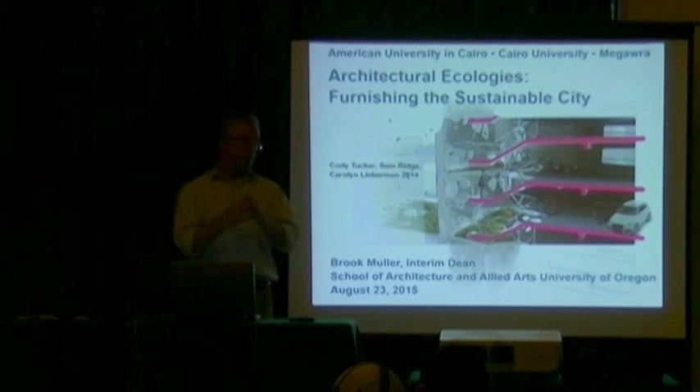And I'm going to start out with a couple of early projects in my practice career that have really set a foundation for my teaching. And also my teaching is a collaborative venture. I work with ecologists and economists largely in thinking about architecture at the intersection of ecology and economies. And I hope that should be clear as we go along.

So I was very fortunate when I graduated from architecture school. I went to Stuttgart. I knocked on the door of Behnisch and Partner. I said my German is sehr schlecht, but I would really like to work in this office. And they hired me, and they put me to work on this competition, the Dutch Institute for Forestry and Nature Research. And we ended up winning the competition. I thought I would be there for 6 months. I ended up living there for 4 years working on this project.

And so basically we're out in this cornfield in the eastern part of the Netherlands, and they wanted to take these different departments, wildlife, biology, landscape ecology, aquatic ecology, and put them all under one roof, this Federal Research Institute. And offices and labs were the two main components programmatically. And so the first idea was to actually separate the laboratories from the offices, because the laboratories are going to require strict mechanical ventilation, whereas we had opportunities with the offices to rely primarily on passive or natural ventilation.

So the first idea is to separate out the parts if they have fundamentally different energy requirements, and you can actually start to make some inroads in that sense. The other idea on this cornfield, so these people do forestry and nature research, and it's a cornfield. So we introduced these gardens, these postage stamp shaped gardens, this array of gardens, and each one represented a different biotope of the Netherlands.

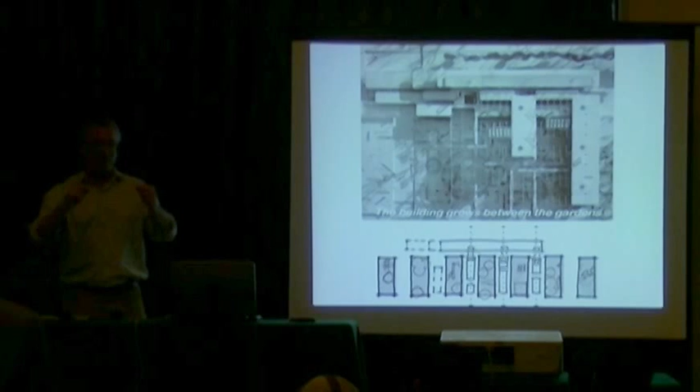So a wetland garden, a meadow garden, a forest garden, and then we grew the building between the gardens. So you usually think of the garden as the thing that changes and is dynamic, and the building is something that's fixed. And we wanted to reverse that and have the garden be the armature within which the building grew. So should this research institute be successful and have to hire a lot more people and get a lot of grants and they need to add on, it's a weak form building by design, and it's very evident where you would add on to it.

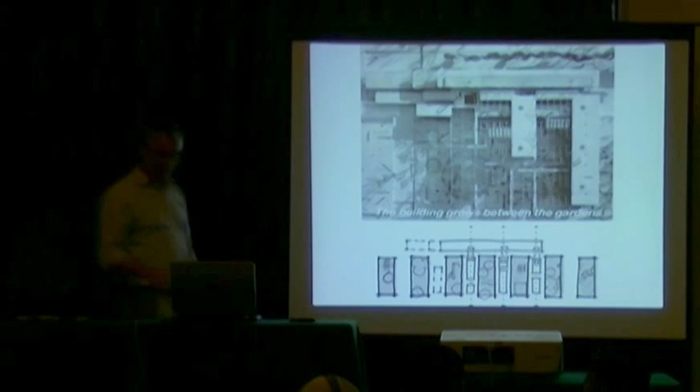At the intersection of the office wings and the garden, where they overlap, we introduced these greenhouses. So you can see the greenhouses here. Single glazed, off-the-shelf technology, very inexpensive, available throughout the country. And we thought of those as energy buffers for the building.

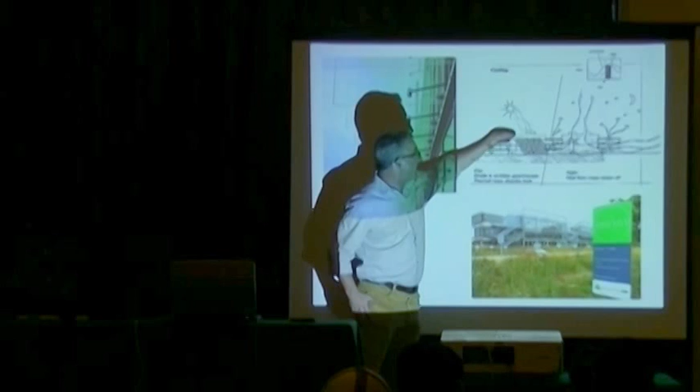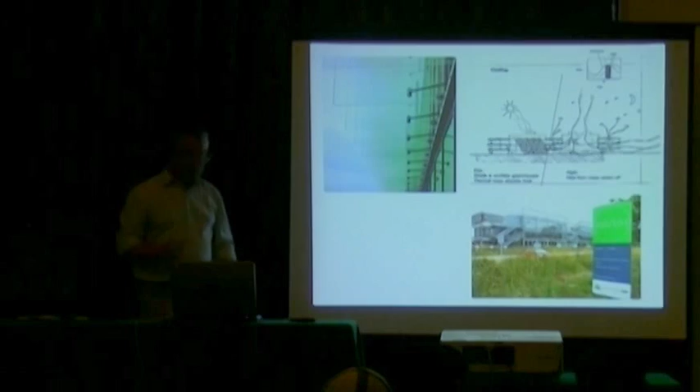So in the summer, during the day, you deploy these shade cloths and try to keep the atrium spaces cool. And at night, you would open it up and bring the cool night air through and try to cool it off. In the winter, you'd do the opposite. You'd have the shade cloth deployed at night to block the heat and open it up during the day to capture the sun. And so this is what it looks like.

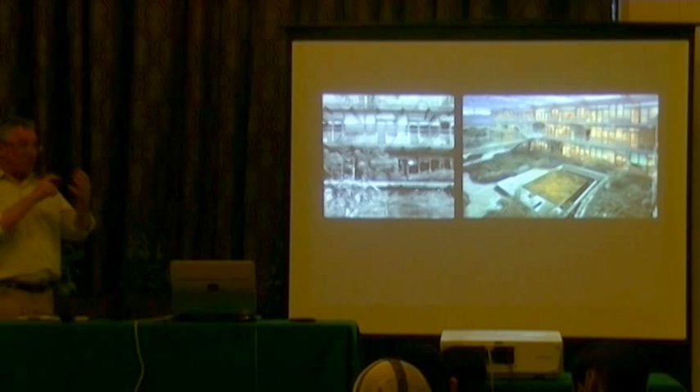And so one of the other ideas that I'd really like to communicate with this lecture is there's an idea about sociability and how people interact, and there's an idea about energy performance, and those things are not separated, they're actually one and the same. So the sociability diagram and the ecology diagram are one and the same.

This is, by Dutch standards, a very inexpensive project. There's no air conditioning for the offices, really reduced reliance on mechanical equipment. We capture all of the storm water, divert it to cisterns, use that water to water the plants. The evapotranspiration of the plants has a cooling effect. Really trying to think of a set of very simple systems that interact to create a low energy building, which is also a really delightful place to work.

And so you can see how dated this is. See the computer right there? You can tell this is a 20-year-old building.

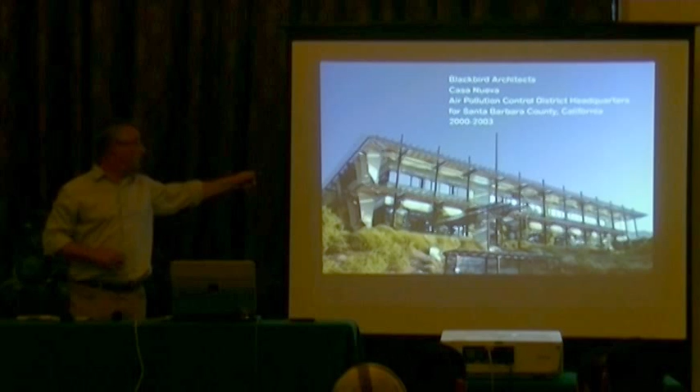Okay, so the idea that the ecology diagram and the social diagram intersect. I went, after my experience in Germany, to Southern California to work with Blackbird Architects. And we were hired to do the Air Pollution Control District headquarters for Santa Barbara County. And it's a very inexpensive building. It's basically 2 boxes, an L shape.

And what we did is we took wooden telephone poles, which are really inexpensive, and we marched them across the south facade and then strung canvas to it. And that's a shade element. And then we planted wisteria vines. So this is during construction. And those wisteria vines grow up. The canvas deteriorates over time. And then the wisteria starts to take over.

And so for the Air Pollution Control District of Santa Barbara County, their billboard is this living facade. And when you open your window, wisteria has a really nice scent. You get the scent of the wisteria coming into your office.

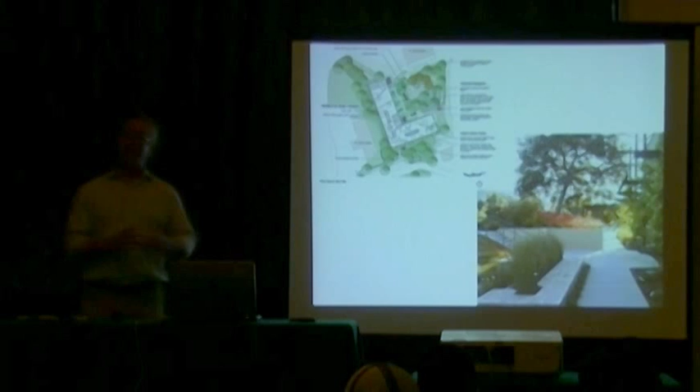So in the United States, interior space is $300 a square foot, and landscape is $15 a square foot. So my recommendation would be to try to think about how landscape elements could be incorporated as part of the very basic bones of the architecture.

Okay, I'm going to give you a little bit of an introduction to, do we want to? Yeah, we'll add some chairs. Okay, if you don't mind. No, I don't mind. I'm amazed. We'll try to add some chairs so that we can have as much as possible. Not at all. I hope I can live up to the crowd. I'm so impressed.

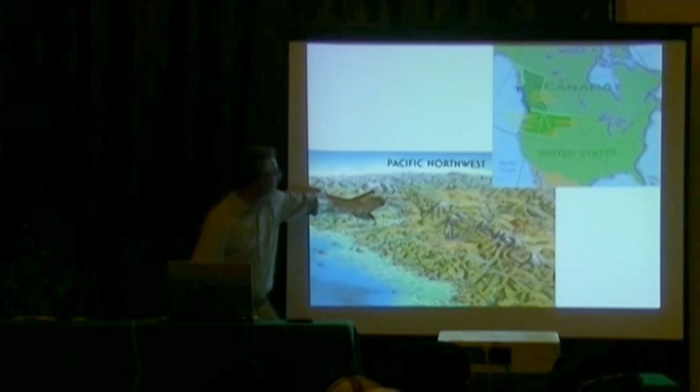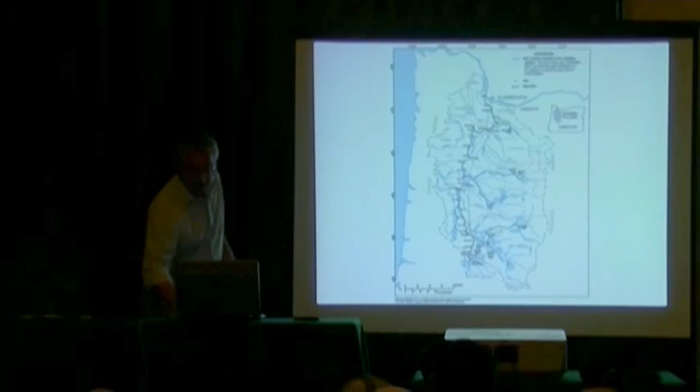So here's the Pacific Northwest. Here's that temperate sliver that I described. Here's Portland, Oregon, Seattle, Washington, Vancouver, British Columbia. I live in little Eugene right here. The Coast Range, the Cascades, and then the high desert. So I'm going to show some images. And so this is the Willamette River watershed right here. Just to point this out.

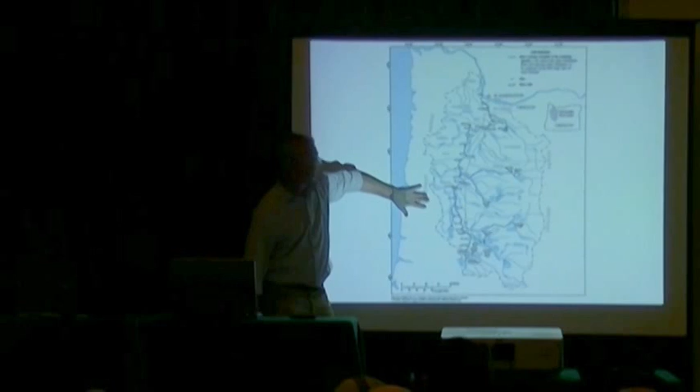By the way, there was a University of Oregon anthropologist who found the oldest pairs of shoes that have ever been found in a cave here. So this used to be a lake, and I think they're about 12,000 or 14,000 years old, somewhere to that effect.

We have Nike in Oregon, so I think there's a connection. We've been doing this for a while.

And so basically in the American West, over a longer climatic history, we have ice ages and then interglacial periods where it's much warmer. And we're thought to be in an interglacial right now called the Holocene. And so it's much warmer over the last 10,000 years than it was 13,000 years ago. And it's getting quite a bit warmer.

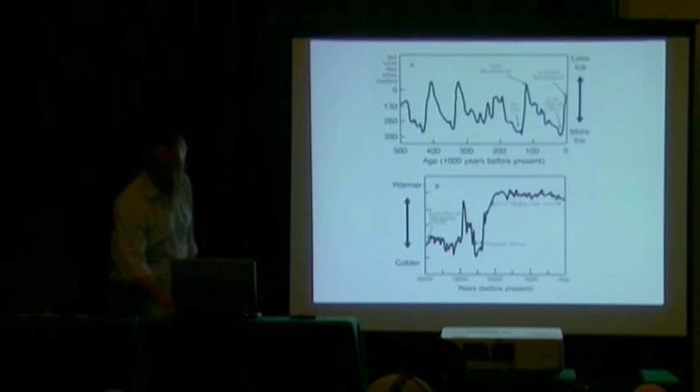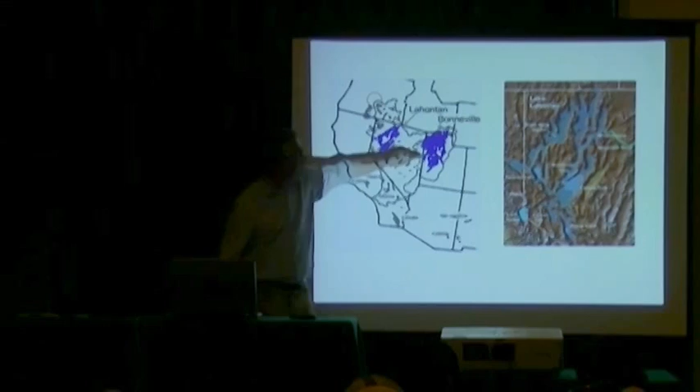So this is where that cave, Fort Rock, was, where the shoes were. And this is Nevada and Utah. And these are historic lakes. And then the remnants of this lake are just this lake, Lake Tahoe, and Pyramid Lake. So over the last several thousand years, it's getting much warmer and much drier. And of course, now we have climate change. So I'm not sure if it's just the natural climate cycle or climate change, likely some combination.

When it snows, the soil is always wet, and it prevents forest fires. If there's no snow, it's very dry, and we have these astonishing forest fires. So when I left Oregon to come here, I flew from Eugene heading east, and for the first 2.5 hours, it was just fires everywhere. I called my wife this morning. It was last night in Eugene, and she said the airport closed. There's no visibility. We have a really big problem.

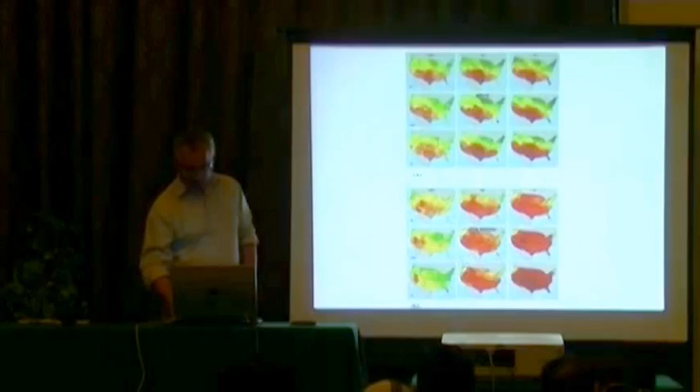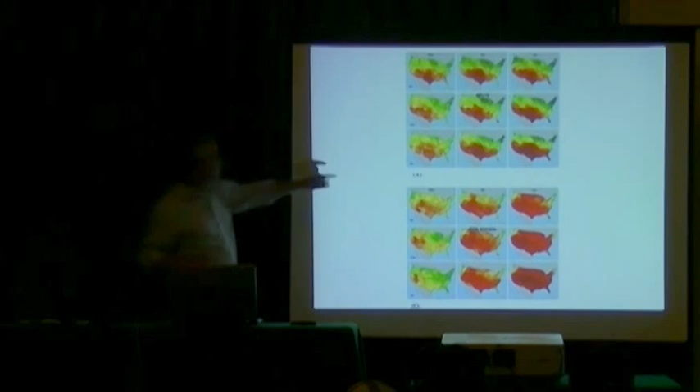And then our projections moving forward are even more severe problems. There are different scenarios for how climate change might play out. Here's the Pacific Northwest. So it looks pretty good, relatively speaking, under all scenarios. If you're in Phoenix, Arizona, or Las Vegas, or Los Angeles, it looks bad under all scenarios.

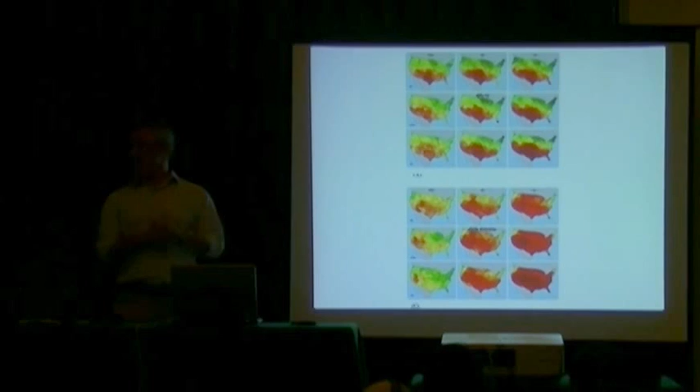California has 40 million people, Oregon has 4 million, but we're currently witnessing an exodus of people from the southwest to the northwest, and so we're bracing ourselves for significant growth over the next couple of decades. So here we have, it depends on how you measure it, but some say the largest infrastructure project in the history of humanity, the California Water Project.

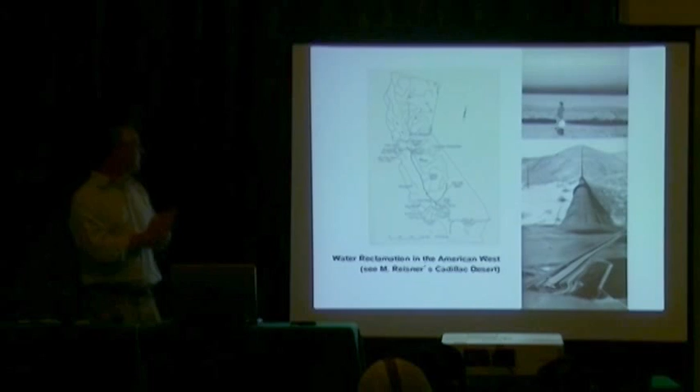And we're bringing water from mountains with snow to Los Angeles, but there's no more snow. So this vast infrastructure is quite vulnerable, actually. And it turns out that 20% of the electricity consumed in California is used to move water. So it's really this combined problem.

The electricity comes from the Hoover Dam. The water is so low that pretty soon they're going to have to turn off the turbines. They're not going to be able to run electricity. We're going to have brownouts. If you're in a building in Las Vegas with inoperable windows and it's 115 degrees Fahrenheit and there's no electricity, they estimate that you have between 15 and 20 minutes to get out of the building before you asphyxiate and die. Okay, so that's our top environmental rating in the United States.

This is a problem. So I'm very proud to be at a school, the University of Oregon, that really looks first and foremost at passive design principles. We're the #1 ranked program in the US for that. And it's based on people like G.Z. Brown, who've been looking at natural heating, cooling, lighting, and ventilating of buildings for a very long time.

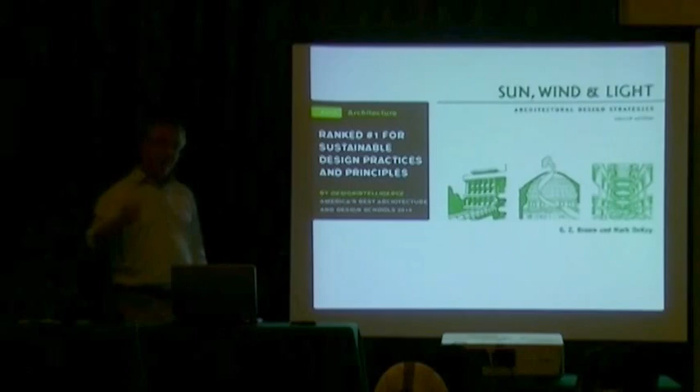So the first thing you do is be intelligent about the orientation of the design, the organization of design, aware of the climate, and only secondarily do you then add mechanical systems. You save money, you save energy, and you can make better buildings as a result. It's more interesting architecture. We also look at these issues at a landscape scale, so our landscape architecture department.

Dave Hulse looking at the Willamette River Basin, developing these really interesting models that look at land use change, climate change, and population growth, and different assumptions about each of those variables and how the future of this region is going to play out. Really, really interesting stuff. And then also affiliated with this entity in Portland called Eco Districts.

So sustainability is not just energy, and it's not just water, and it's not just mobility, and it's not just habitat and all these other factors, but it's really thinking synergistically about how these things interact with one another. So we can rely on less energy, less material, less effort to make buildings that are more intelligent.

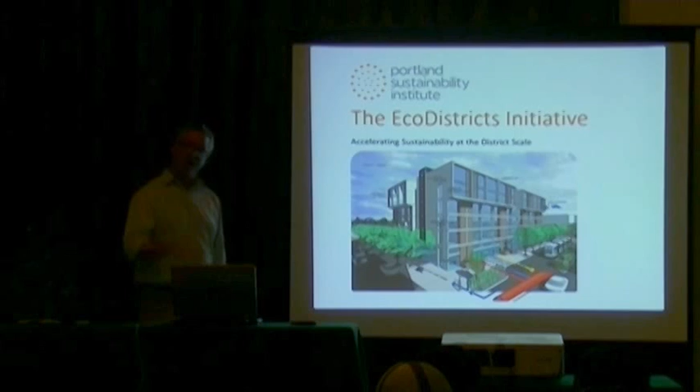And frankly, I had a tour of some medieval Islamic architecture in the city, and that's just some of the most intelligent architecture you will ever see from a climate adaptation point of view. It's like we have to return to our history to look for ways of making architecture in the future. But I really like how they're saying, the building scale may not be the scale to address this most optimally.

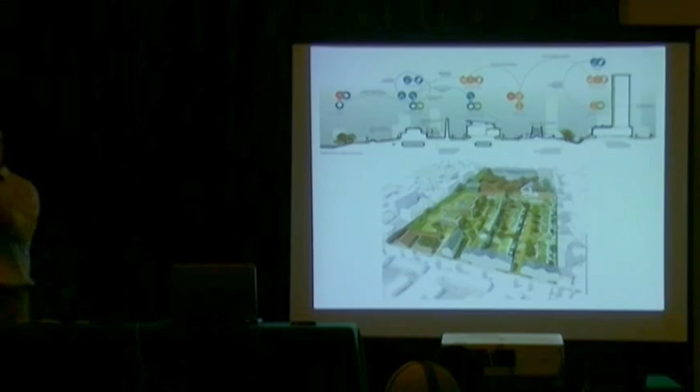My building site is high and dry, and it's great for collecting the sun, and yours is low and wet and great for collecting water. So why do I have to do all of the work myself? How might we partner to achieve greater efficiencies? So this district or neighborhood scale may prove to be the most effective scale to be thinking about this stuff.

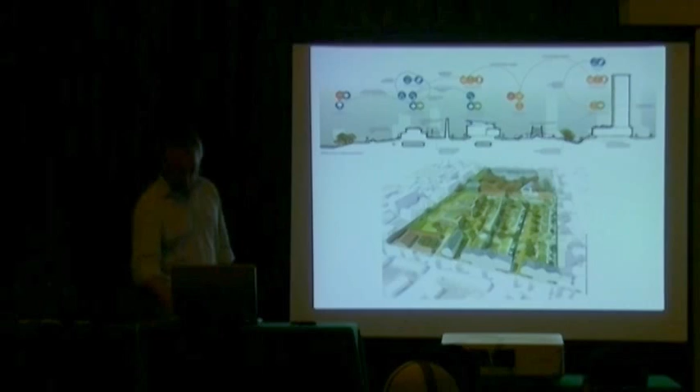But that's going to require new finance models. And so in addition to the design, how are we going to fund this thing? So my site's high and dry and yours is low and wet. What incentives do we have to pool our resources? How does the money flow? And so people are actually working on finance models that incentivize these kinds of partnerships, which I think is really, really critically important.

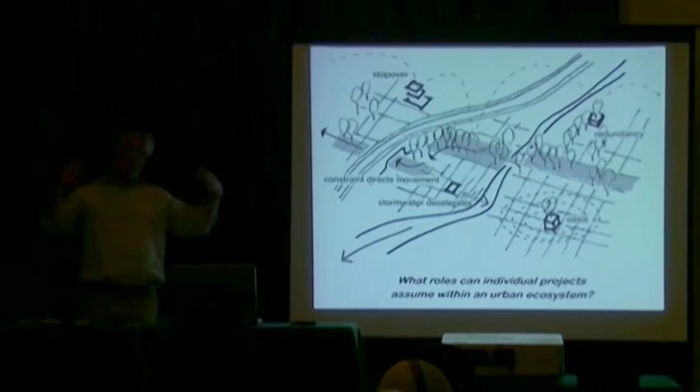My own particular work, actually working with an ecologist, we start to ask, what roles can individual site-scale architectural projects play in supporting broader ecological function? And it's a pretty interesting thing if you start asking yourself, when you work on your projects this coming semester, if you're a student in a design studio, what's the role of my project in the watershed? What's the role of my project relative to these larger ecologies?

And so at the massive scale, the city scale, Buro Happold's new city in China, we can start to think about green and blue as part of the infrastructure of the project. So wetland complexes for stormwater collection to prevent flooding, to provide habitat, and green space for the lungs of the city and for wildlife connectivity and all these things.

That's all great for a new city. I tend to work in existing environments. The city's already there. I have this little site, and I'm trying to think, how can the aggregate of smaller scale moves start to build something more functional from an urban ecological point of view?

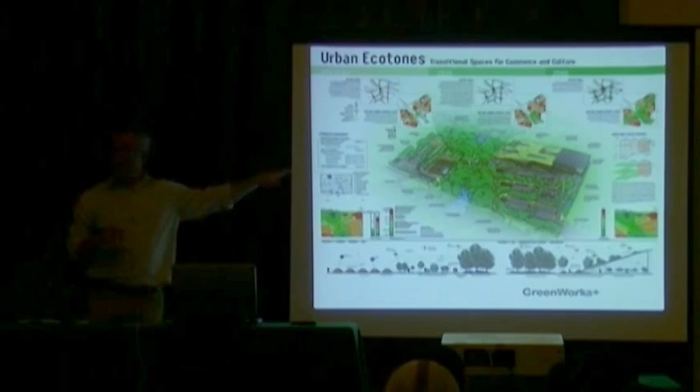So this is a suburban project, a retail project, but actually the site plan is such that you're protecting and supporting the hydrological function of adjacent wetlands. So the building is actually collecting, filtering, cleansing water, the green roofs, before it's directed to these wetlands. And so again, there's some interesting synergies that we can start to create.

I had a student working on a... high density in Oregon is a 3-story building, okay? Just to put things in a little context here. We start to get nervous when we get up to 4 stories. It's like, wow, big city stuff.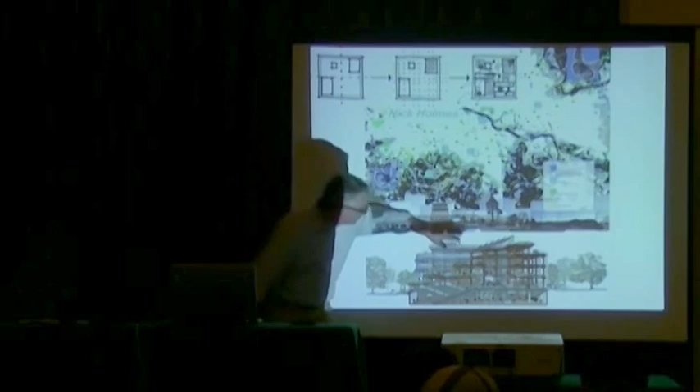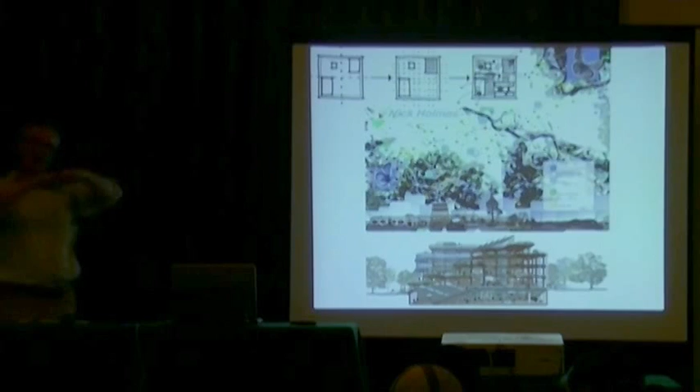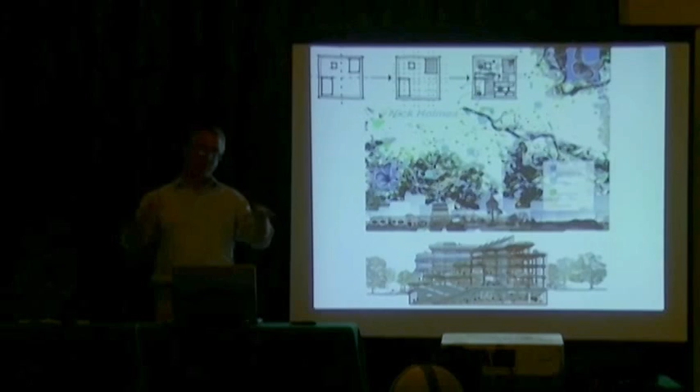So just so you know. But he was looking at a building in downtown Eugene and looking at this fragmented butterfly population in the southwest hills and the northeast hills, and he started to realize if I plant Kincaid's lupine, the larval host plant for this butterfly, on my roof, I could have a stepping stone for that population to intermingle, ensure a more diverse gene pool, and ensure the long-term survival probabilities of this species. So using elements of buildings as part of a strategy for ecological regeneration.

And if you think that's crazy, many of you have probably seen the California Academy of Sciences project by the Renzo Piano Building Workshop. And I got to meet this guy, Paul Kephart from Rana Creek Living Architecture. He does the largest green roof installations in the world. And so here's Renzo Piano with this beautiful, evocative sketch of this roofscape that's mimicking the Golden Gate hills of San Francisco in the background.

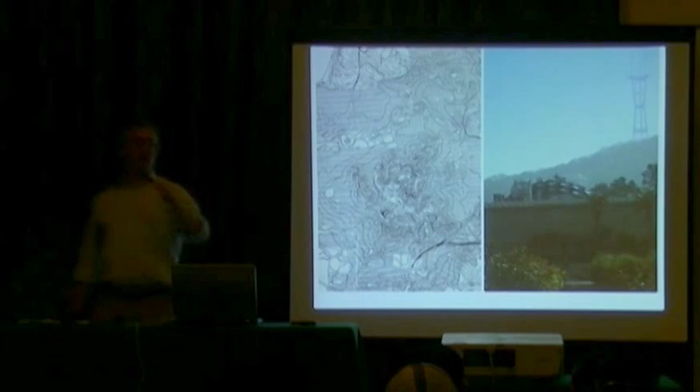Paul Kephart, who installs green roofs, is looking at this undulating roof and he's like, this is amazing because I only do flat roofs. And if you have an undulating roof, you have a shady spot and a wet spot and a dry spot and a sunny spot. And I can create a much more diverse set of ecologies on this rooftop. So he calls his work acts of eco-sabotage because he uses native wildflowers and grasses he plants on these roofs. So he's thinking about roofs as nurseries for endangered species, which is pretty incredible. Sometimes the architects don't know it. Sometimes they do.

So a green roof. Where I live, we get a lot of rain in certain periods of the year. And with all of these hard urban surfaces that are polluted, that rain gets directed really quickly to the waterways, and we have flooding, and also the pollutants kill fish and other species. So the idea is to have green roofs reduce the rate of stormwater flow to water bodies, to moderate the temperature inside the space itself, to reduce the urban heat island effect.

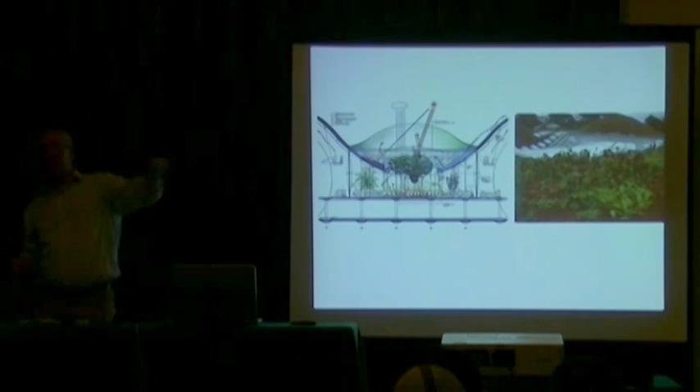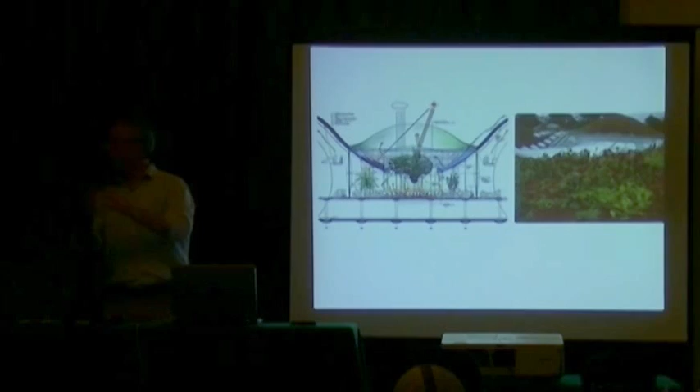But Paul Kephart's saying we could also start to think of these as part of a connective system for macroinvertebrates, bugs that are flying around, that birds then will be attracted to. So birds making their way up and down the Pacific Flyway. I love the idea that one building is part of a hemispheric migration. It's a pretty beautiful thing. And there are people who go up on this roof to do bird counts, and it's really working the way that it was intended.

Of course, I don't know how many millions of dollars per square foot this project is, so it's not like this is going to solve our ecological degradation issues. And then this guy has a nursery, and he's devised these really innovative trays to transport things. They're made out of coconut fiber, and you can just lift them into place. Over time, the coconut fiber deteriorates and provides nutrients for the plant. So a pretty thoughtful approach. But it doesn't have to be habitat, and it doesn't have to be expensive.

So I thought I would just show this one last project before moving into the second half of this talk. So this is a fairly new, very modest project called the Burnside Rocket in Portland, Oregon. It's in this sort of light industrial part of the east side of Portland.

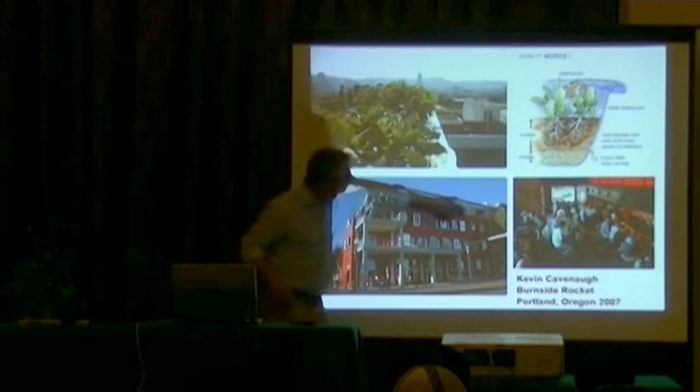And there's the restaurant on the top floor, and they wanted to do an integrated green roof, but they didn't have the money. So they bought a bunch of plastic children's pools, kiddie pools. They drilled holes in the bottom, they put them up on concrete blocks, and then they're growing food.

So if you order a salad in the restaurant, it's coming from above your head, up in the roof. And what they're finding is that the microclimate of the roof extends the growing season in this cold climate by 2 to 3 weeks.

Okay. So one of my favorite authors, David James Duncan, wrote an autobiography called My Story as Told by Water. And because my name is Brook, I'm going to tell my story of architecture as told by water. If energy was the first generation of sustainable architecture and climate change and carbon footprint the second, there's no question. Everywhere I go, people are confronting major, major water issues. So let's think about that.

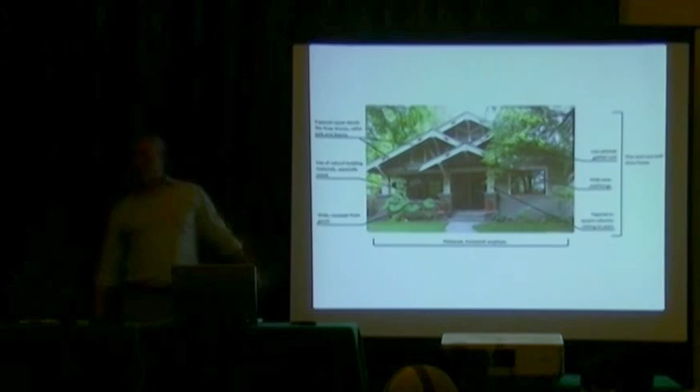This is a typical house where I live. It's called a craftsman style house, a bungalow. And all of our buildings that are small are made out of wood, almost every part of the building. And so what I learned in school is because it's a wooden building and wood rots, you need to have eaves that extend well past the roof. And that might be a nice bracket detail, but that's going to rot. That's called a rot vector right there, and you want to avoid that.

And then we learned a lot about flashing details. And I love flashing details. I get really excited about flashing details. So this is a wooden house and a wooden deck, and this is the ledger that you bolt through, and then you have to flash this ledger. What's interesting is the detail calls for copper or galvanized steel flashing. So if you have enough money, you'll use copper because it lasts forever.

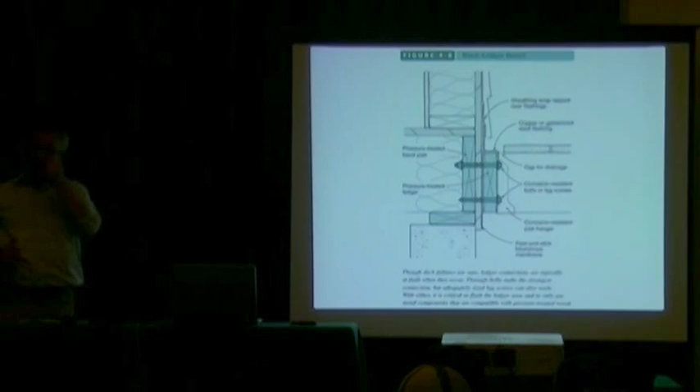But I had no idea until I started working with an ecologist that 12 parts per billion of copper in the urban stream can actually be incredibly damaging to salmon and other species. It affects their ability to smell, which is their primary means of defense. So if there's a predator swimming around and chomps a salmon, the salmon sends out pheromones into the water, and then the other salmon all drop and go still. And if they have copper in their noses, they can't smell, and they just keep swimming and they get eaten. I had no idea.

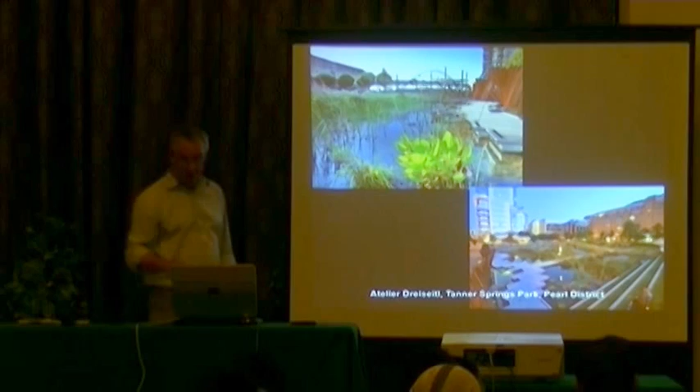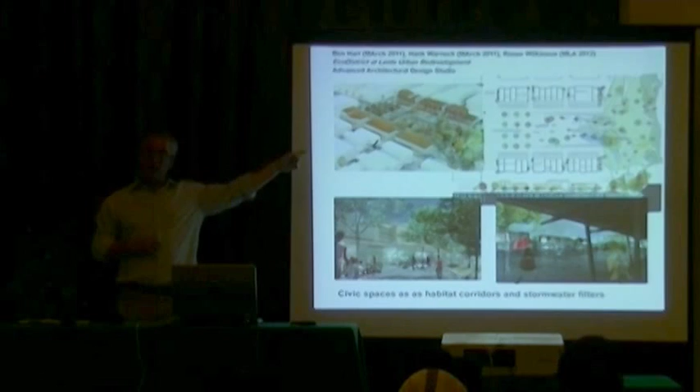I've had students explore possibilities for it. It rains, it's kind of cold, it's almost freezing, and it rains all winter and it's sunny all summer. So maybe we don't want to spend a lot of time outdoors in the winter. Maybe this civic space is a stormwater reservoir in the wintertime, and it's a flower market and farmer's market in the summertime. So we could start to have multiple uses associated with one urban space.

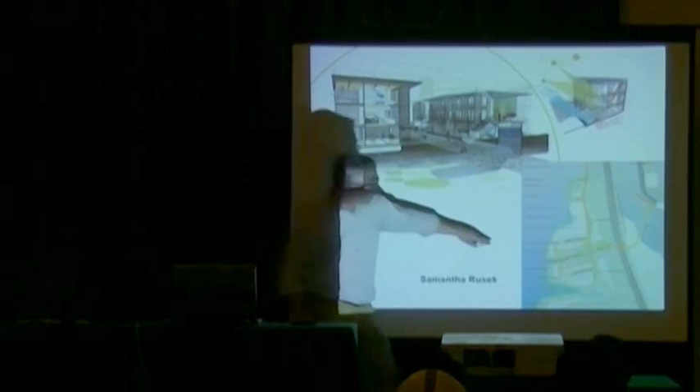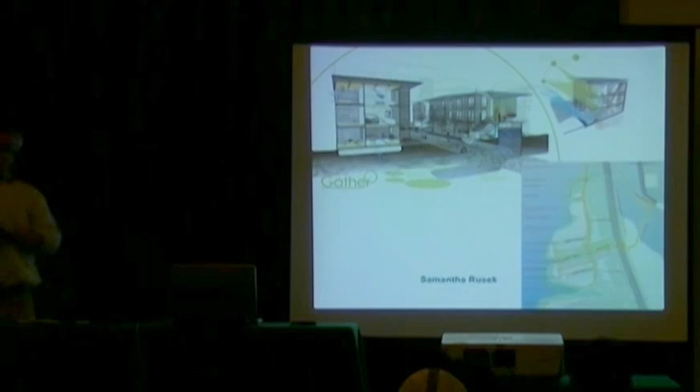Or a project by Sam Rusek. So this is a residential project of these wings along a river. And so here's a wing of houses, high density Oregon, okay? What I'm really interested in is, can some of this actually play out in a much denser urban environment? It's one of the reasons I'm here. I actually am convinced that it can, but we need to work on it.

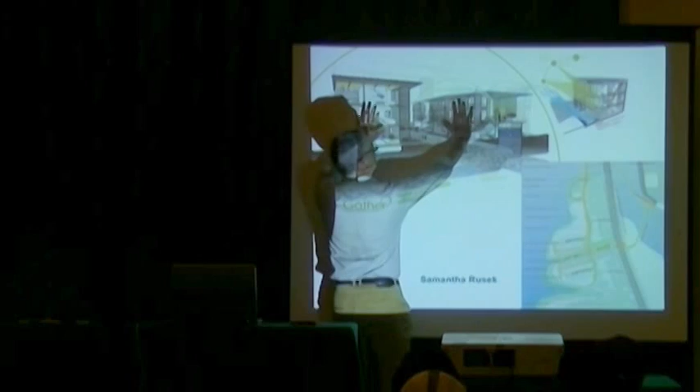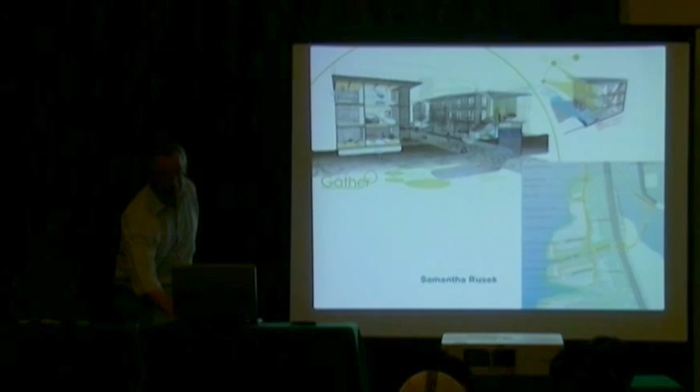But here's some residential wings, and here's a stairway to get you up to the upper level. So where the people collect is actually where the rainwater collects in these cisterns, and then it's used in the building, and then the excess water filters through this permeable walkway. So here's the two wings. Where the people collect is where the water collects, and instead of the water sheet flowing, it starts to have this undulating journey to the river. So the social diagram and the ecological diagram coincide. Similar idea with this particular project.

So we start to think about the physics, the moisture, the behavior of buildings in relationship to the larger atmosphere, and really starting to think about architecture as these systems that are thoughtfully and efficiently interacting with one another. I think it's an interesting direction for architecture.

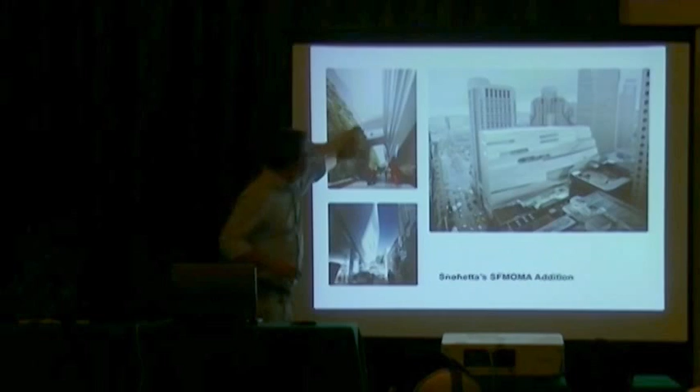Perhaps my favorite example would be the new SF MoMA addition by Snohetta, San Francisco Museum of Modern Art. Snohetta wanted this living wall in the courtyard, but they hadn't really figured out how to get water to the living wall. Hyphae Design Laboratory calculated that on a typical day, there is 1,200 gallons of condensate buildup in the interior spaces of the building. That is the sweat of human beings. And we're going to direct that water to the facades and to the living wall, and that's where your water comes from.

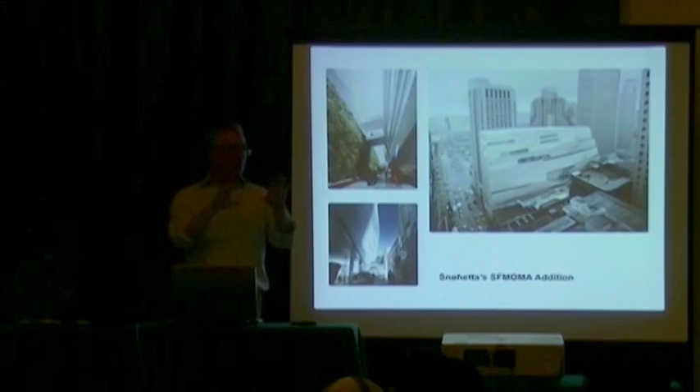So you might want to think about working with a biologist, and I'm more and more convinced. We start with space and then add systems. What would happen if we started an architectural project with the water systems and then built space around it? It might be worth speculating about that possibility. So that leads me to the last project that I want to talk about.

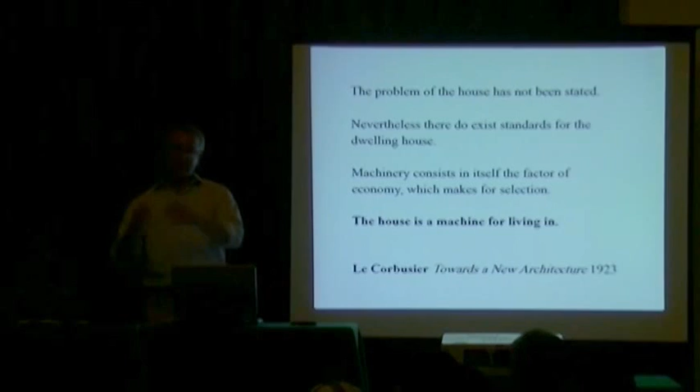A machine is a watershed for living in, and I hope you get the architectural humor. Do we get it? It's a take on perhaps the most famous proclamation of architecture in the 20th century. Le Corbusier, Towards a New Architecture, 1923. The house is a machine for living in. Probably the most influential sentence in architecture in the 20th century. All architectural theory since then is basically commentary on that sentence. I'm thoroughly convinced of it. Okay? So is the organism the metaphor for the 21st century? And we could have this conversation.

So the idea is to collect the water, make use of it. I know your hydrological system here is fundamentally different, but we get a lot of rainfall. In an era of climate change, it's increasingly fewer and more severe events. So we want to capture that water. We want to put it to work as thermal mass to keep the building cool, as seismic dampening, as fire suppression, for kitchens and bathrooms as well. We're going to clean the water in the process, and then time the release of the water to the adjacent water bodies to flush the system with clean water when the system needs it the most.

So there are going to be fish making their way upstream, and there's going to be a detector in the stream, and it's going to tell the building the fish are coming, and the building's going to tell all the other buildings the fish are coming, and then we're going to send that clean water to the stream to dilute the poisons that they're having to deal with.

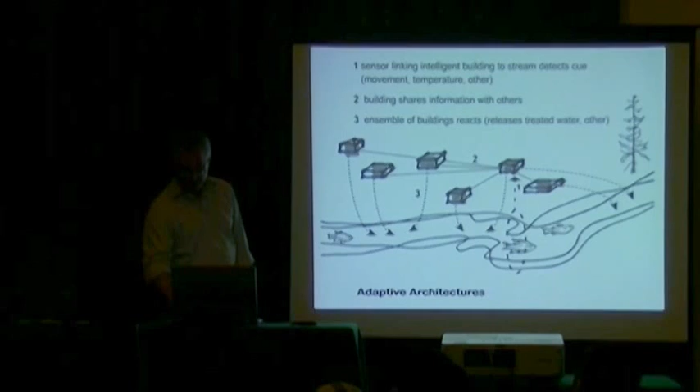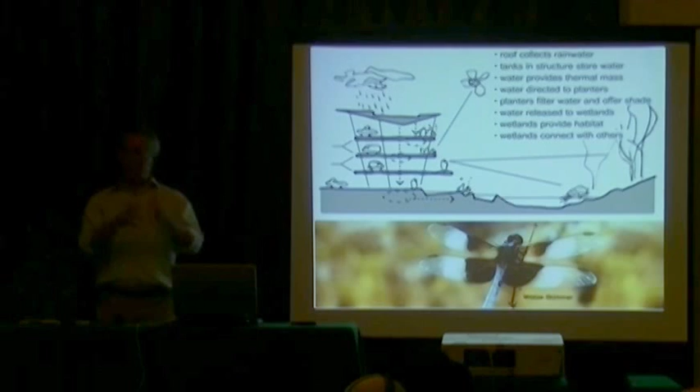So we thought we would take as a studio project a parking garage. In the early history of the parking garage in the United States, it was a full-service operation. So you'd pay to park, but you'd also get a car wash, tune-up, and oil change. And so we're going to reintroduce that full-service deal.

We're going to collect water from all the neighboring buildings and the adjacent bridge. We're going to divert it out of the hydrological system. We're going to bring in these pollutants called cars. We're going to give them a bath. We're going to heavily step cleanse that water, and then we're going to time the release of that water to the wetlands that we're actually going to create as part of this project.

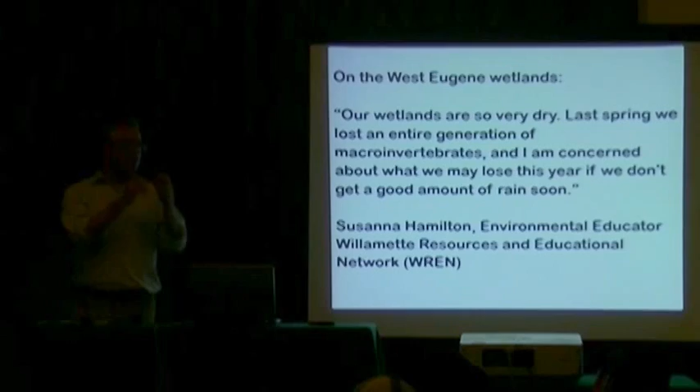So we've had increasingly dry springs. The macroinvertebrates, dragonflies and other flies, they can't live because the water levels are too low. Their early life histories are in the water. And so we're losing this whole food chain which birds depend upon, which fish depend upon. It's kind of an instantly catastrophic ecological situation. So what we're going to do is use the relative hardness and predictability of the urban environment to support these processes in a time of climate change.

So here's our site in Portland, Oregon. This is called the South Waterfront District. It's about to develop. We're going to have 30-story buildings. I know it's kind of hard to believe. And the reason it hadn't been developed was that they built ships here during the Second World War, and they dismantled ships after the war. And as a result, there's cobalt and PCBs and all this awful stuff in the soil.

And they realized the safest thing to do would be to cap the soil as opposed to removing it and digging into that stuff. So they put this geotextile mat, the thickness of an LP record, down over the entire site, put earth on top of it. Our ecologist consultant, Mark Wilson, said, "That's perfect. That's wetland subbase. You've created it."

This guy, he follows construction equipment around construction sites, and he is watching these trucks compact the soil, and he does percolation tests of the soil. He's like, "You've created wetlands. Just add water. You've got them." So the idea that construction processes could be regenerative biological and ecological processes is pretty interesting.

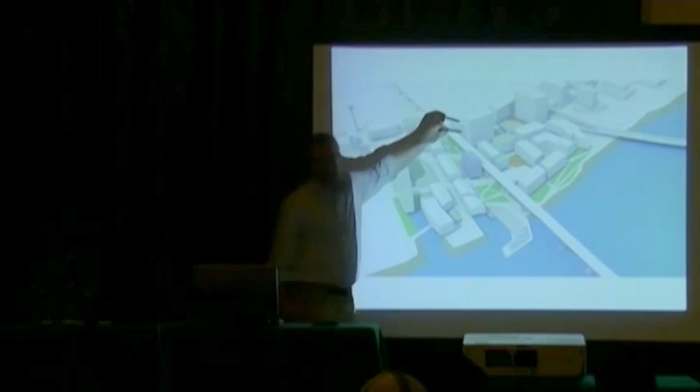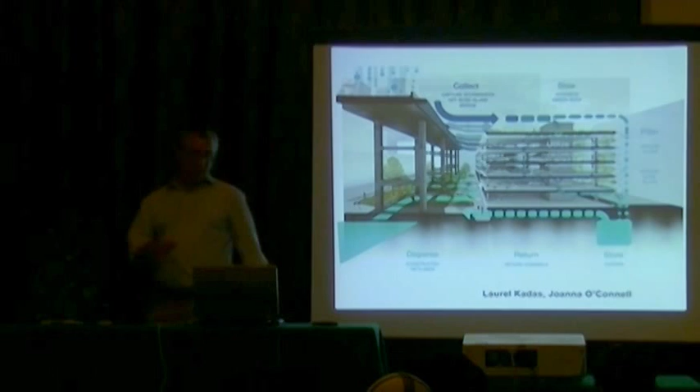So here our parking garage is going to be back here. We're going to collect the water, pull it out of the cycle, clean the cars, send it to this system of kind of quasi-riparian pre-treatment gardens, and then, this is the longitudinal section, ultimately to these wetlands, and then that cleansed overflow will make its way into the Willamette River.

Just a couple of more projects. They were going to use mycofiltration. They're going to use mushrooms to clean water. So we're going to be in the forest of cars, underneath the canopy of cars. And we're going to spray the cars with the water, and we're going to clean the water through mushrooms.

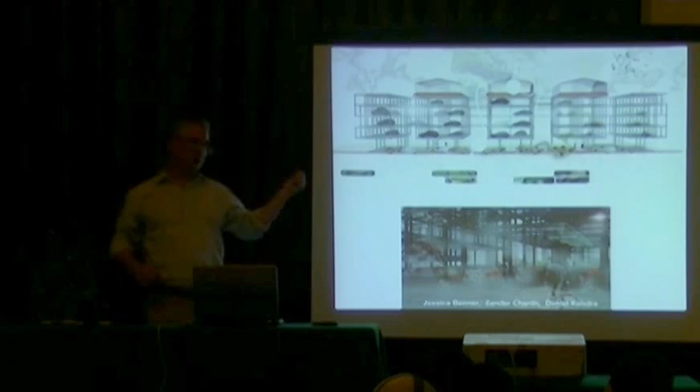I like this scheme, very simple, because basically they're saying Portland has a goal of reducing automobile traffic by 50% in the next 35 years. So we're not going to need parking garages. So we're going to convert these to greenhouses for urban food production, and they were thinking about that as part of the design.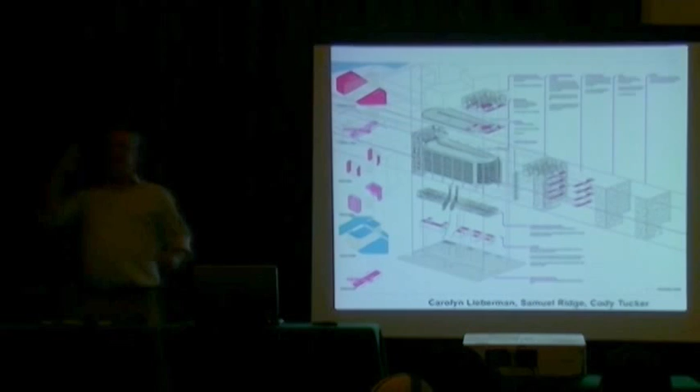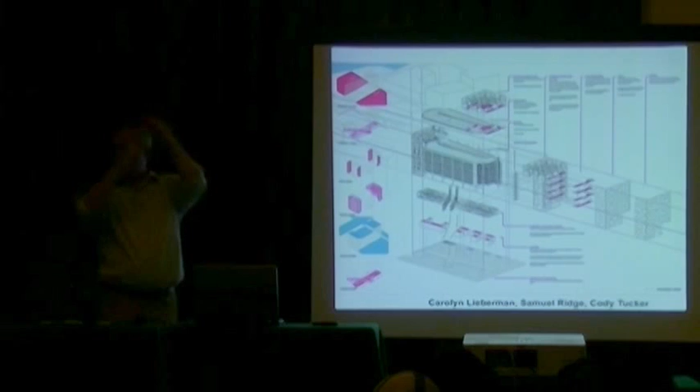And then just a couple more. This is an idea of these parasitic, these prosthetic devices, these filtering elements. They're where stairs are, but these stepped, living, cleansing elements for the water that you could attach to parking garages, to office buildings, this kit of parts that you could attach to buildings throughout the urban environment.

I have to give my student team props.

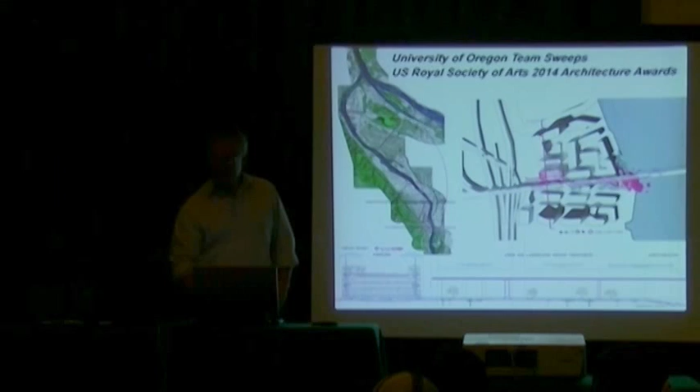This group of 3 third-year undergraduate students submitted their project to the Cooper Union in New York for the Royal Society of Arts Awards last year, and they ended up sweeping the awards, the architecture awards, which makes me very proud, because if you're in New York, Oregon is off the edge of the civilized universe. It's just like, it doesn't even exist. So to go in and to take home the bling, I thought that was pretty good. It made me very proud. They're like, you can use a parking garage to do what?

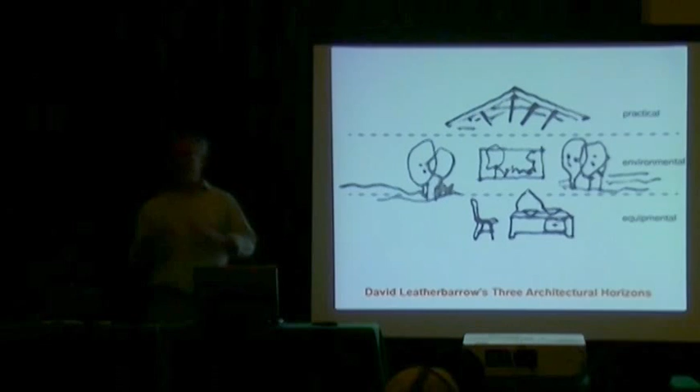Okay, one last thought about architecture before we finish. David Leatherbarrow is a very well-known architectural theorist at the University of Pennsylvania, and he wrote this wonderful book called Uncommon Ground. And in this book, he talks about 3 architectural horizons. So there's the equipmental horizon. This is the seats that you're in, the sort of furnishings that make possible this lecture this evening. The practical horizon is the roof over our head, so it doesn't rain on us, or the walls to our sides. And then lastly, the environmental horizon, which is the environment beyond the practical and the equipmental.

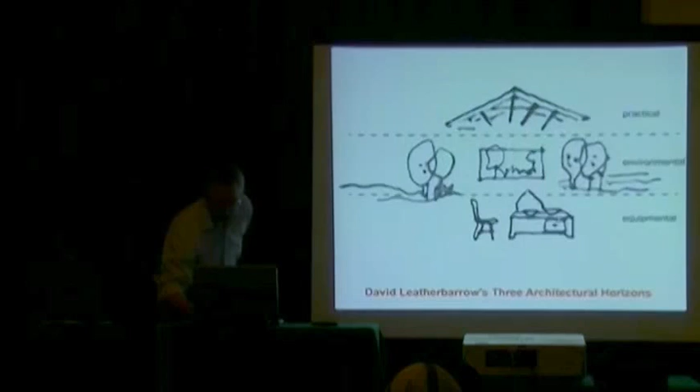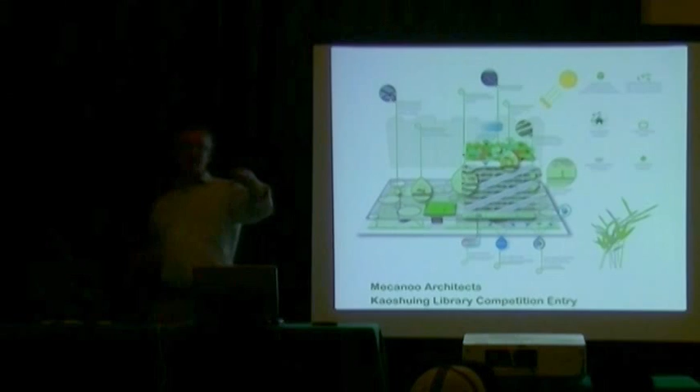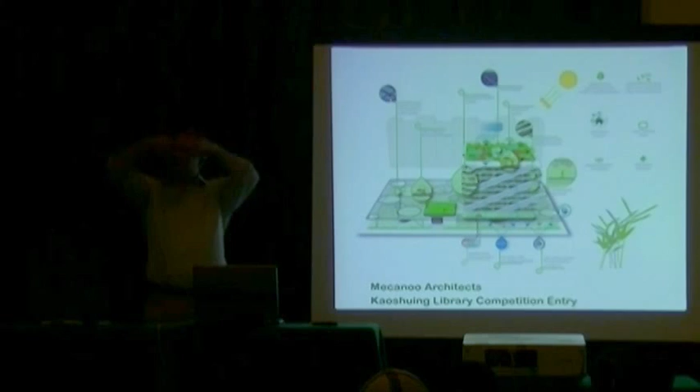And as I start thinking about these kinds of projects, one thing that I get really excited about is that we're going to reconstitute architectural horizons. So this Mecanoo Architects competition entry for this library in China is basically, the architecture is an environmental horizon and an equipmental horizon that are collapsed and put together. That's basically what it is. And then maybe the practical horizon is the watershed within which that building is situated.

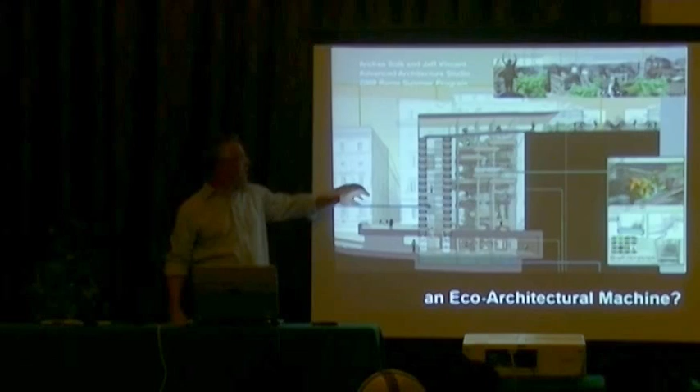This is a project that these students in a Rome studio did, a 2-week charrette, where these are sand filters in concrete, and basically you walk into this space. It's cleansed water. The water supply of Rome is probably the cleanest water in the world, but something happens between the water that comes in and the water that goes out, and the Tiber River is horribly polluted.

So the idea is, you walk down, it's a hot summer day in Rome, you're in this cool environment, you go up through this slot stair, you make your way to the roof, to the ubiquitous roof gardens of Rome. You look out into the distance and you see the aqueduct where the water came from. You make your way down through these bio trays that are filtering all the gray water from the neighboring apartments, and you make your way throughout the city.

So this sort of kit of parts, again, prosthetic device, where the practical horizon is this larger space. We're going to furnish this larger room, and the architecture itself becomes a fusion of the equipmental and the environmental. And that is also what I think that project begins to communicate, and where I'd like to investigate the possibilities further. So thank you.

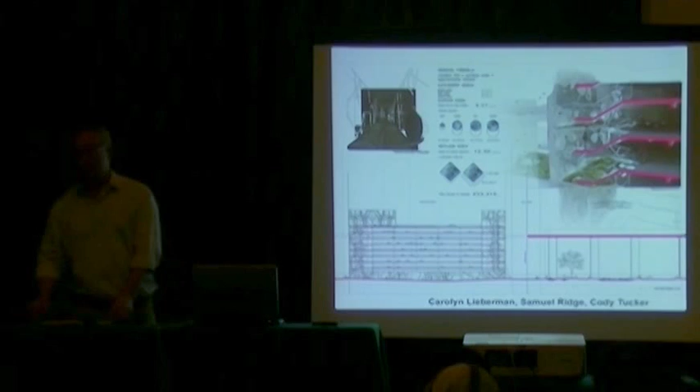Thank you, David. I think this is very interesting. A lot of issues raised. I would like actually to just jump directly and open the floor for questions. And then through the questions, there could be some commentaries and some issues that are being raised. So give us your thoughts. Give us your ideas. Ask.

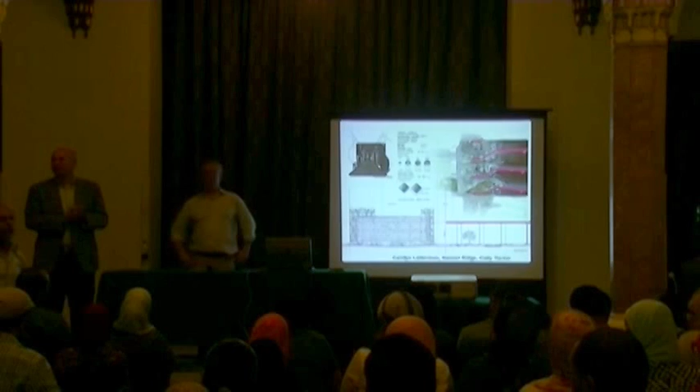Oh, you can, and then we translate. And we can translate. Yes.

Asking about the feasibility of planting roofs. For example, in a country like Egypt, we spend a lot of money to insulate this roof. Yeah. And I thought actually they will insulate it perfectly. Oh yeah. How do you deal with that? That's an excellent question.

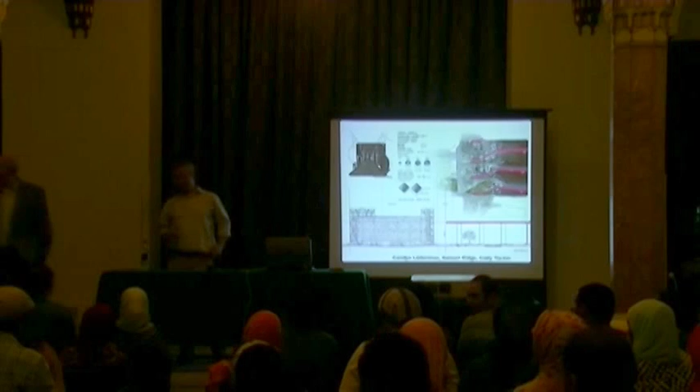There's a tremendous amount of enthusiasm to do these integrated green roofs right now. There's also what are more disintegrated green roofs, where you lift the container off the ground, like the kiddie pool. You can do it really inexpensively or more expensively. So I think there's got to be a way that you can follow the water and make sure it's not causing a water damage problem.

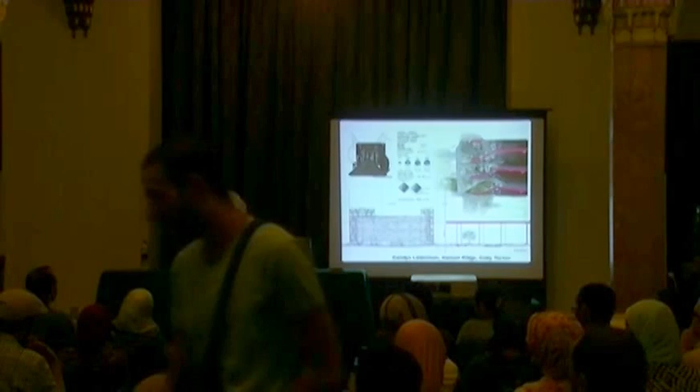I actually start to get a little bit nervous about the integrated green roof with membrane and all this stuff. What happens when it starts to fail? Are you going to be able to detect where that is? Sometimes a disintegrated approach is perhaps more promising than an integrated approach. Okay, yes?

What is the best way to measure the benefits of a building that has an ecological system and compare it to a building that has LEED Platinum? How do you measure benefits like moving with the sun, greenery, hosting butterflies on the hill?

How to quantify? Yeah, that's a really good question. There's a whole sort of ecosystem services finance models, which would probably be the most. That's what my ecologist colleague Josh Cerra does. He's at Cornell. So he looks at ecosystem services, and you can measure the value of constructed wetlands that are part of a project development. We get all of these intense rains, and we've channelized the river, and we start to have flooding problems, and we have 100-year floods every 5 years now.

And so we talk to insurance agents. I mean, we can start to quantify it in those terms. I know I'm naive, but do you want to put a dollar sign on an endangered butterfly? I don't know. But there is the quantification, which has to do with the functional integrity that you're reintroducing to prevent things like flooding. Is there any value to clean water? Is there any value to cleaner air? And there are these emerging ecosystem models that start to put dollars on those things.

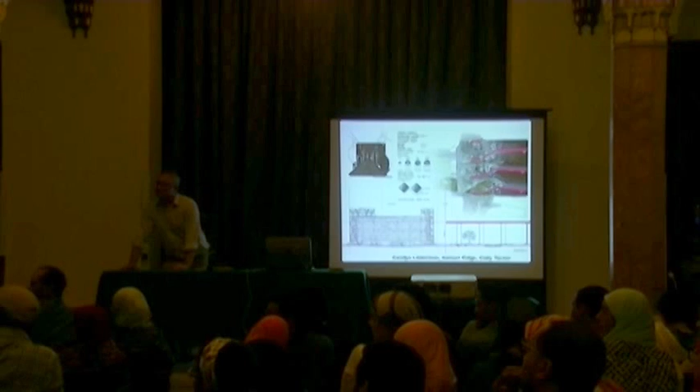Okay? Yes? So if we think at a larger scale, in a city, for example, how do we reach these environmental benefits at this scale? And what about existing cities? We are thinking about building new buildings like this, but what if it's an existing city and it's not environmentally good? So how do we improve the city to become something we can call environmentally friendly?

That's a great question. So I think that some of these projects are in existing cities. They may be all new buildings, but the prosthetic device logic could apply just about anywhere. Carl Steinitz is a brilliant professor of landscape architecture at Harvard University, and he says that if you don't get things done well at the planning scale, it doesn't really matter what you do at the building scale. It's all going to be wrong, which is fine, but I'm an architect who works at the site scale, and I don't have the opportunity to affect things at the larger scale. So I'm trying to think about it as more surgical scale interventions in the city.

And there are some examples. There's a South Korean architect who's looking at these sorts of interventions for 70-story buildings in Seoul. So I do think there are examples of that, and I would agree that we have to deal with the infrastructure in the urban environment that we have to work with. So what can we do about it? Are there pockets of space, whether above ground, way above ground, or on the ground, that we could start to reappropriate to do these things?